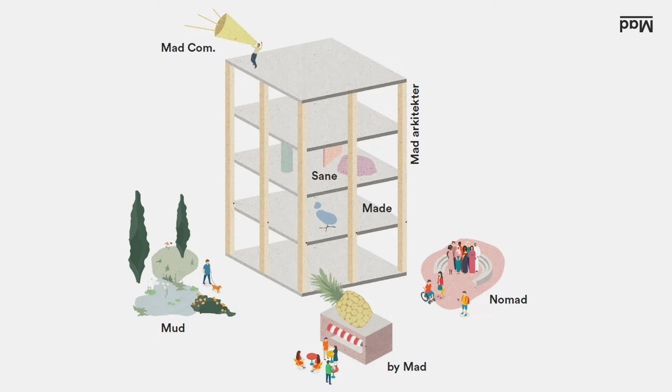And we are a Norwegian interdisciplinary architectural office working in several fields, approximately 100 people. We work with urbanism and architecture, interiors, landscape architecture, neighborhood planning. And our most recent adventure is by MAD. That's our own cafe bar. So if you are ever in Oslo, please come to visit.

We work with a broad range of projects, as I said, in all scales. Public buildings, libraries, new faculty of law in Oslo, city repairs and urbanism, big residential projects. And over the last years, we have worked more and more with transformation. Yeah, this is us. Our people are the most important, they are essential to the output of our projects. And our end goal is, of course, always to contribute to a better society.

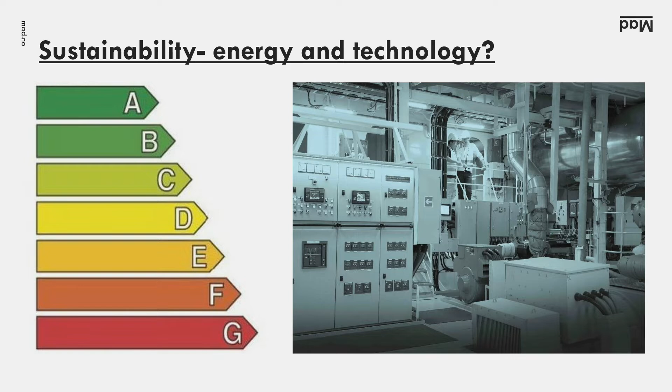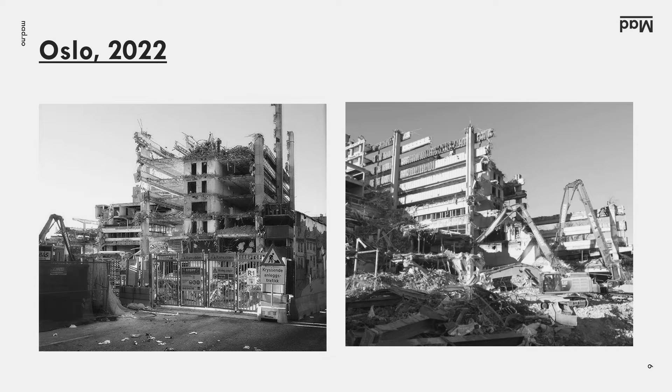Okay, I'll be very short with a quick intro of some of the challenges that we see in today's building industry. I won't dwell on these, but we should face that the building industry has a great impact on many of these goals and a great responsibility. Over the last decades, the building industry has tried to change radically to make buildings more sustainable. But the focus has almost always been on energy and technology. And we demolish buildings like never before to replace them with new ones. More energy efficient, maybe, or with better technology. And we can't continue on this path, we all know that.

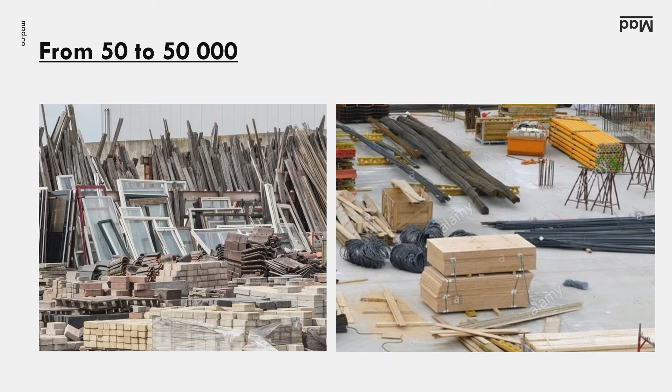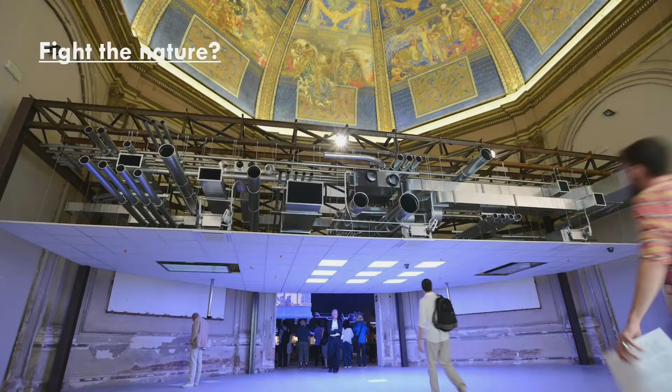We have seen that when we construct a building, in the old days, we might have needed about 50 different materials or components to construct one building, like wood and brick and steel and glass and so on. Buildings of today require an extreme amount of materials or components, and we can choose from millions. This is an installation by Rem Koolhaas from 2014 in Venice Biennale, and I think this image just says more than 1,000 words. And how did we end up like this?

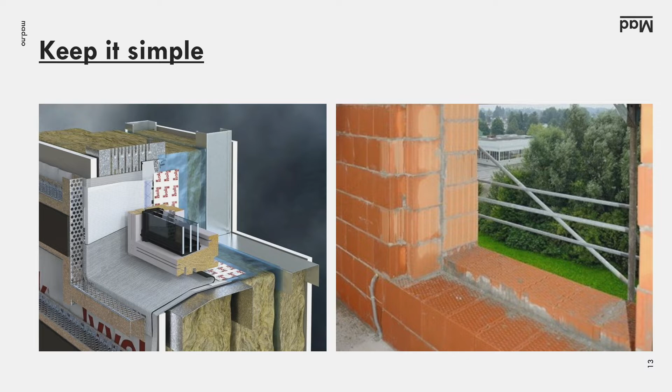The amount of components is one of the reasons and one of the problems of the great amount of waste in the building industry. These are just examples of outer walls. And the linear economy has given us materials that come with an assembly instruction. And suddenly we have installers instead of craftsmen. And we think that the simpler way, or the old-fashioned way of building, would be possible also today, but it needs a higher level of competence, both by the designers and the builders.

Okay, I'll show you some thoughts about what I think would be the buildings of the future. There might be more aspects to this. First of all, we are told that about 80% or maybe more of tomorrow's buildings are already here. And to not demolish buildings is great for sustainability. And it can also give our architecture and our cities a great and important historical and identical continuity. This is an example from Bergen in Norway, a transformation project finished 2017.

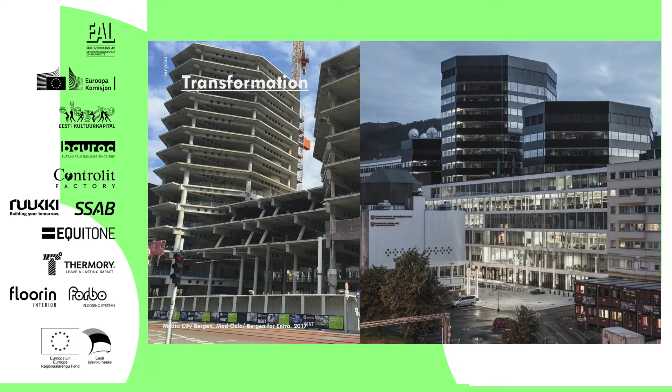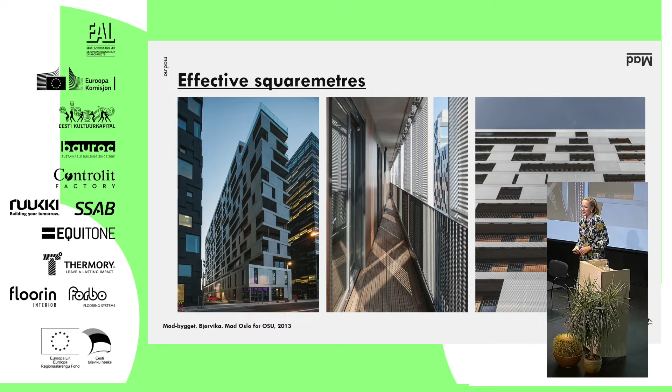If you look at living space and square meters per person, at least in Northern Europe, it has increased dramatically over the last years. And that means that the effect of less energy for our buildings is neutralized by higher consumption, which is a problem, of course. This is an example of one of our earlier Oslo projects. It's a housing block with a quite special format. It's only 7 meters wide and 90 meters long, and it had some challenges due to square meters.

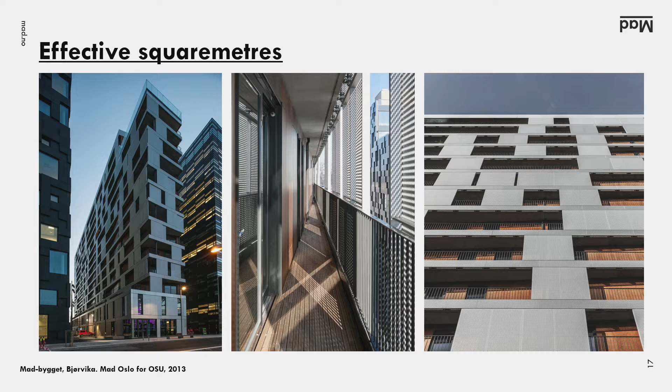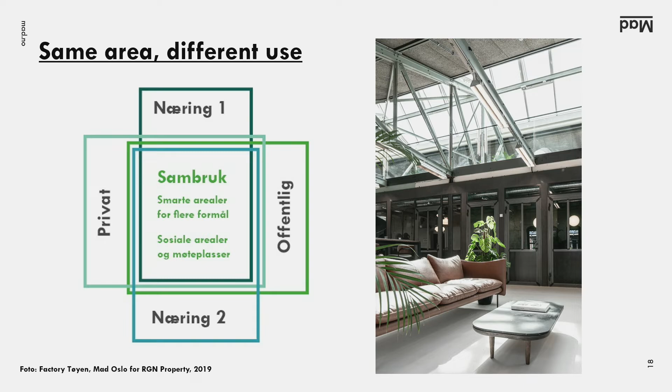And if we really want to cut our use of resources and build better societies, we need to use our buildings more. We need to use them for more hours during the day and for more purposes. Because the most sustainable square meters are the ones that we don't build. And that cuts emissions in all stages.

I just want to mention low-tech buildings also. I enjoyed the previous presentation, although I didn't understand one word. I loved the drawings, and I could understand some of the concepts. We haven't worked much with this yet. We hope to work with it someday. Our colleagues in Switzerland have come far. I just wanted to mention it.

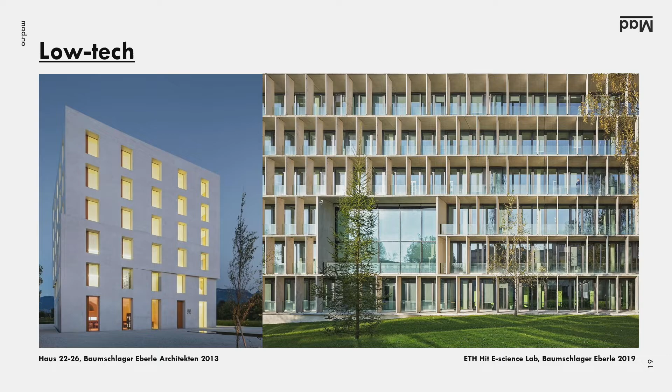And when my husband saw this, he's also an architect, he said, so you're going to build it from a different kind of garbage than you usually do. And I thought it was very funny.

I'm going to go into one of our projects to break the tradition of resource use in the building industry. We designed this project for a developer called Entra, one of the biggest private real estate investors in Norway. And they have a high focus on environmental sustainability. Spaces is the tenant of the building. They are an international co-working space company. And they have been really important for the realization of this project.

KA13 is located in the city center of Oslo. Since this drawing is made by an architect, you have no idea where it is. But this is the royal castle up here. And this is the parliament. And so it's in the middle, city center. And many people think that this project is a big project. It's not. It's quite small, but it has made a great impact.

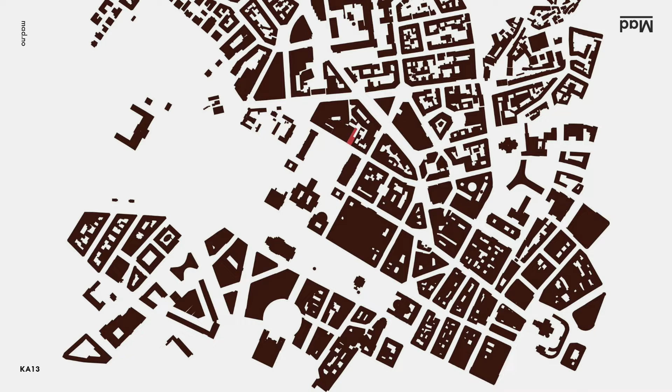And to put it short, we could have built a new building, but the amount of square meters wouldn't have increased very much. So that's the story behind why we kept the building. But once we were inside, we struck gold, and we found very nice and high-quality interiors. And we had a simple and flexible floor plan, which could be great for modern office space. And you see, there's the typical plan with the existing building and the new extension, and some of the interior photos.

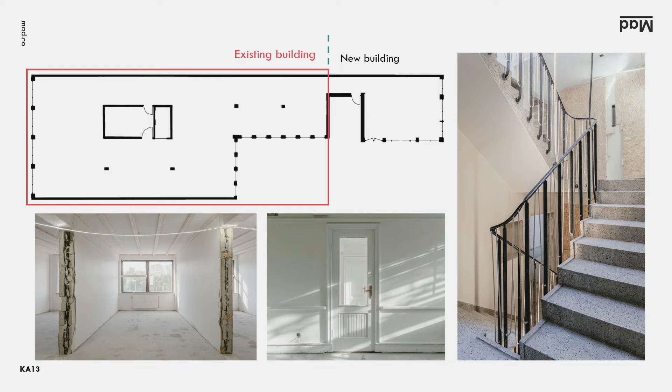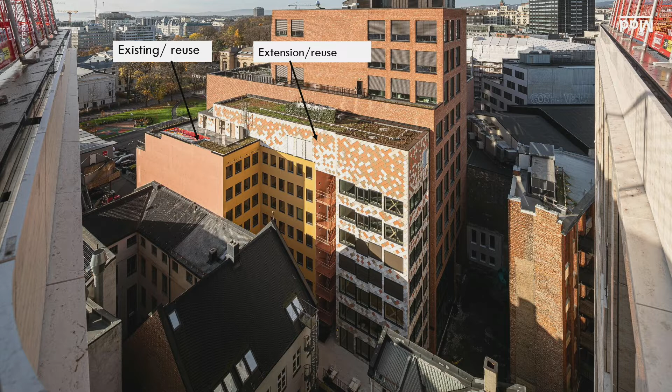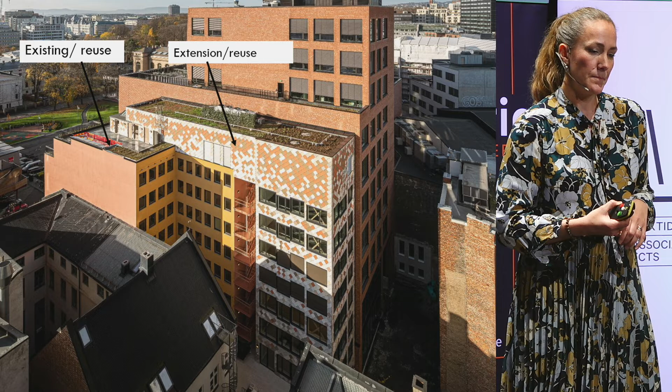With these discoveries, we decided to preserve the existing structures, and we simply added a new extension to increase the project's capacity and, of course, square meters. We built a new 8-story extension with reused building components, and those are sourced from many rehabilitation and demolition sites across Norway. Here we see the building from the back side, from the courtyard side, and the yellow and terracotta facades are the existing building. And that more playful facade is the extension, highlighting the fact that this is somehow a bit unusual building.

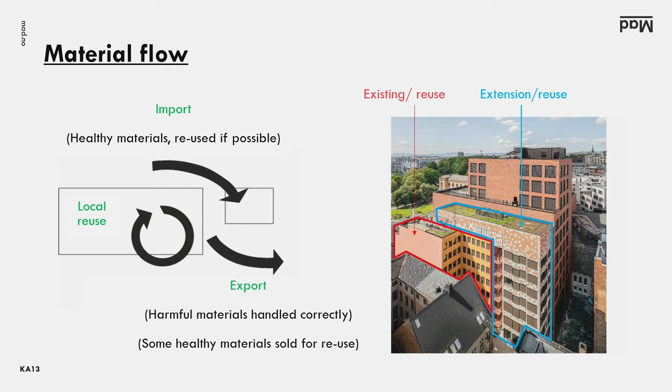The programming remained the same with offices on all floors. We included a bar and some new functions on the street level, but all in all, it's an office building. We had different material flows in the project. We preserved the existing building, of course, with all its components and materials within, which we would call local reuse. And we reused materials from other buildings, which were under rehabilitation or set for demolition. And even in a circular project, some things go into the circle and some things have to go out. Of course, with harmful materials and some healthy materials sold for reuse.

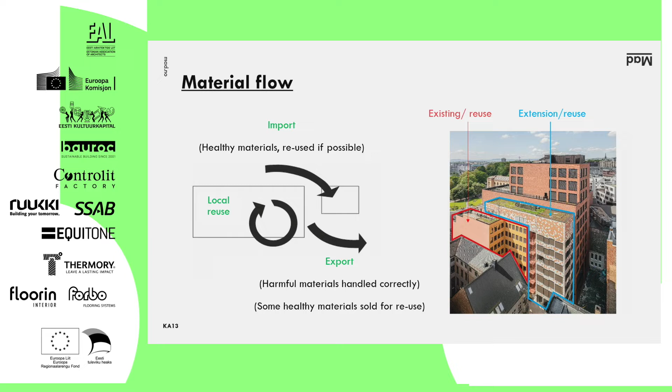So how does this process work? We have been working with reuse and transformation buildings for quite some time, and we have got useful skills and experiences. But reusing single building components, as done in this project, is something quite different.

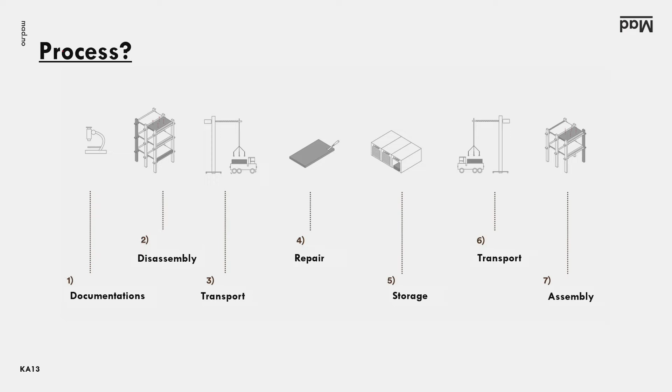And we made this diagram before we actually embarked upon this journey. And we tried to convince the market that reuse is doable and to help plan the process. And after the project, I'll show you in a while, we saw that this is a bit too simple, a bit naive. We thought it would be something like this, and it was more like this.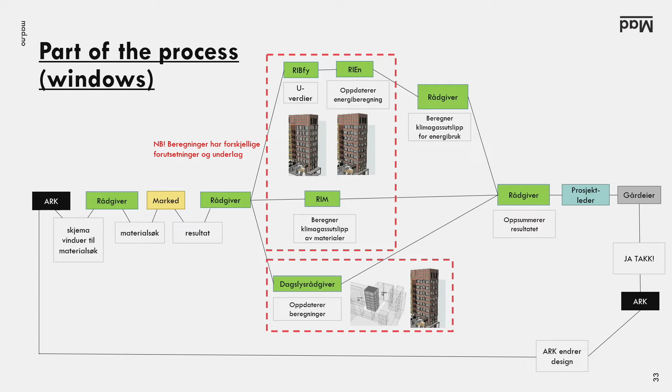I won't go through this in detail, but you see the chain. It's dependent on many different processes and decisions and stakeholders. This is a typical one for windows. I don't have time to go through it, but it's many different considerations made, and in the end it goes to the owner, and maybe they say yes, and if they say yes, they go back to us as an architect, and then we have to implement it into our drawings.

The amount of information is enormous. And the process diagram that we made before the start is more relevant as an overview of the new building industry and its many business opportunities. Examples: registering, developing databases, demounting, buying and selling, logistics and storage, testing and certifying, adjusting, industrialization of the process.

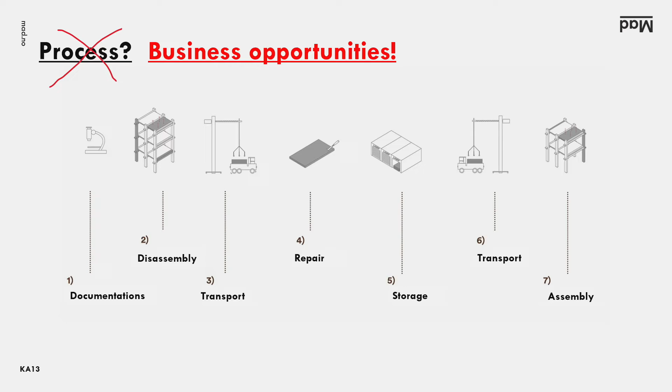I think this will go fast. We have learned now from the last 4 years. We started this in 2018. It has developed a lot in Norway and in many other countries.

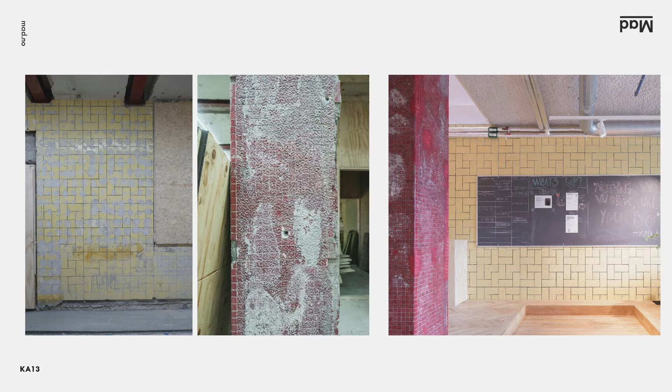Regarding the architectural concept, in order to maximize the daylight, we decided to make an atrium with vertical openings through all the existing floors and a large skylight on top. And behind paintings and plasterboards and a lot of different materials, we found a bit of everything, including colorful old tiles, which have been taken care of and restored.

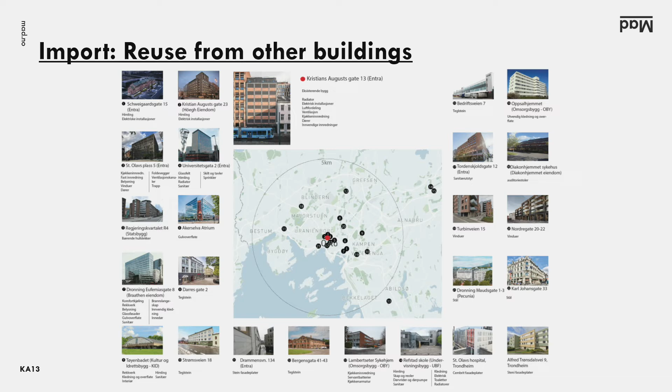But then there were the other materials from other buildings. How to find reused building materials? This was one of the first challenges that we faced. There was no marketplace for buying and selling, especially not for large-scale components. So we created our own network. And here you can see the sources for the reuse elements. They come from more than 25 different buildings and sites. And a small selection of components that we reused, from ceiling panels to doors.

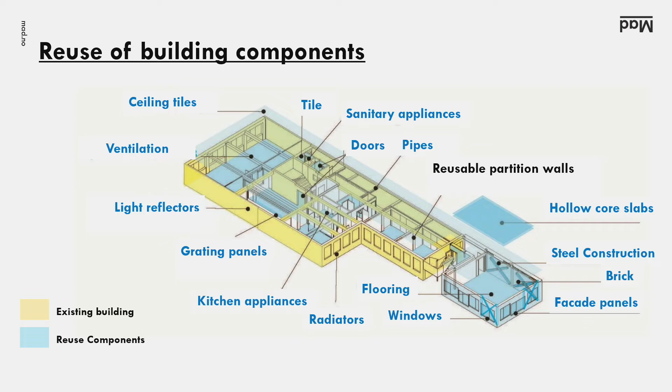This is a figure of a typical plan. The yellow is existing and the extension is in blue. I'll go through some of the components. The government headquarters in Oslo are currently under redevelopment after the terror attacks in 2011. A number of buildings are being condemned or set for demolition as part of the new plan. And the hollow core slabs in the new extension are sourced from one of these buildings.

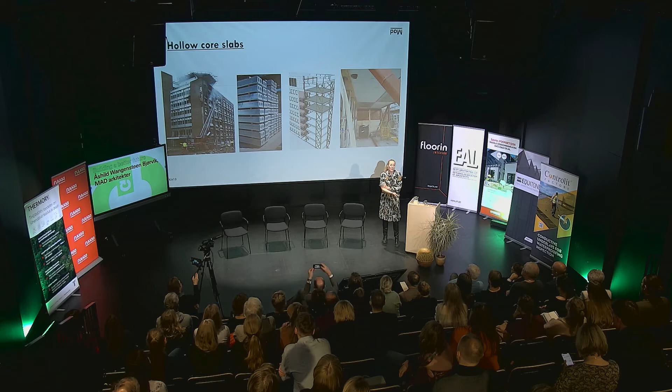There were several different challenges with engineering and logistics and cost, but it has shown that it's possible to reuse structural elements. And I can mention that these reused slabs resulted in 89% lower emissions for this specific component. And it's important to note also that it has already been saved. It's not something that we project into the future, like we do with energy calculations.

Steel structures: approximately 70% of the steel structures are reused steel. And mostly they are bolted together, not welded, so it's possible to demount and use them somewhere else in the future, when this building's life cycle comes to an end.

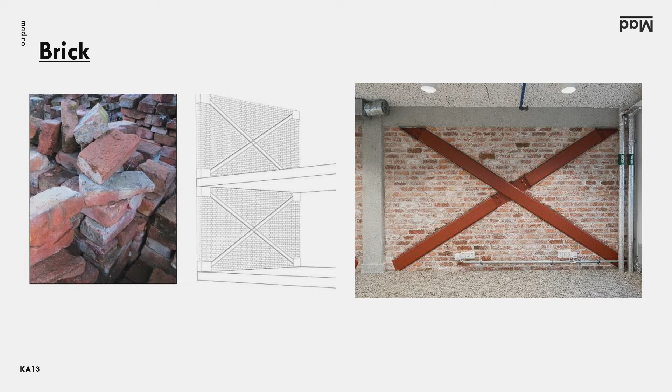We reused brick. This is a load-bearing firewall, and in standard procedure for this kind of building, it would have been concrete. But we decided to make it out of reused steel and brick. And this is a typical construction from my colleague Trond. He loves this wall because it's like the old German constructions, like outer walls of brick and wood. And it has become an interesting wall that people like.

We got the windows from another project, and they had ordered and received incorrect windows. So this is surplus materials.

It was a big housing project in Oslo, and they received windows that couldn't be opened, which is a problem for housing. It's a bit easier for office buildings. And to the left, you can see the original facade sketch with quite regular windows. But we had to adjust it because we didn't know the format. And these processes didn't really coincide. So we had to make a rhythm for the windows that could adjust to different kinds of formats.

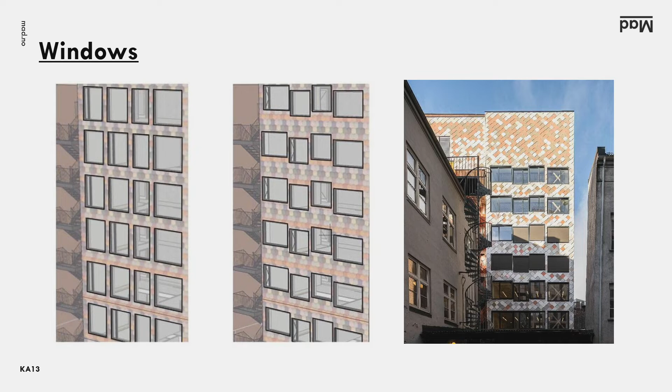And this exemplifies the difference from a conventional design approach. And it has made the facade a bit strange, but it could have looked even stranger. The facade panels were sourced from 3 different buildings, 2 in Oslo and 1 in Trondheim. The plates were trimmed to smaller sizes, 40 by 40 centimeters. Some of them got painted and then mounted on the facade in quite a traditional way.

We love this facade not only because it's a bit different from many others, but also because it's flexible and you can change parts of it and adjust, and you can take it down and use it in another building without any big problems. You can vary the colors and you can mix it all together. We worked a lot with this, both in the design phase and on site. Yeah, you can see the donor building over there. Maybe we should have kept the graffiti.

The bathroom tiles, most of them are surplus materials. We called the tile supplier and they said, yes! And then we got 15 pallets of tiles to the building site. And we just had to choose on site, you know. We couldn't make any schemes or any details or anything. We just had to choose them and lay them out and build, which was wonderful.

And the result is kind of refreshing. Every one of these rooms is unique. And I think we would have wished to find more colorful tiles, you know, because they're only like beige and black and grey for the time being. But anyway, it looks good.

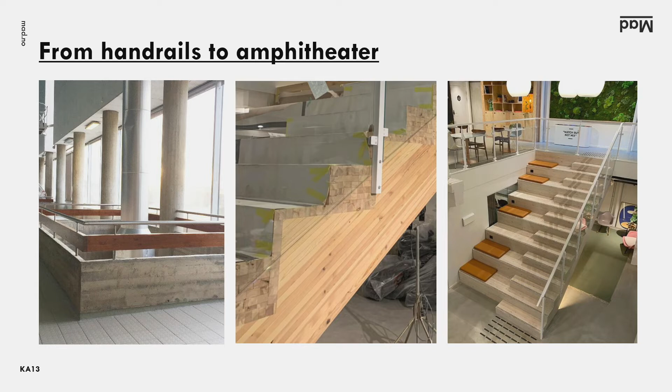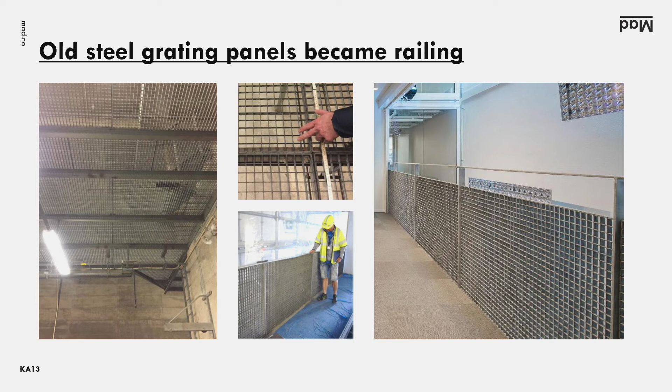Old steel grating panels. This is a floor in a technical room in the same swimming pool building. We often get asked, isn't it boring? Isn't it difficult? But it's very, very exciting. And to find new functions and new use for elements and to put them into a new context can be a very creative experience. These were flipped and became railing. And it looks easy, but these workers were swearing a lot when they mounted these.

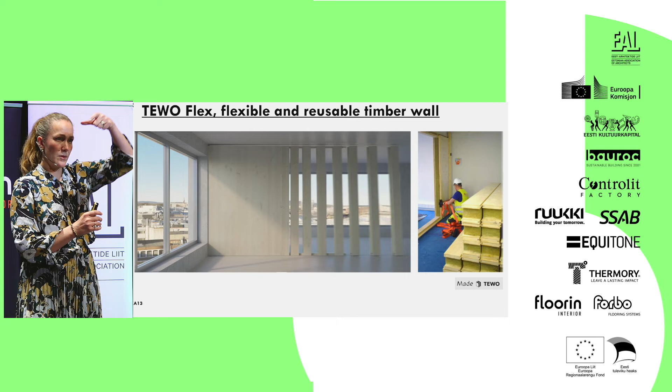We also had some new elements in the building. These are office partition walls in massive timber, made in Norway. We designed them as modular blocks. They are about 20 centimeters wide, and you can put them together. You have a line on top and on the floor, and you just skew them together. And then they go click, and you can demount them without tools, and you can put them somewhere else,

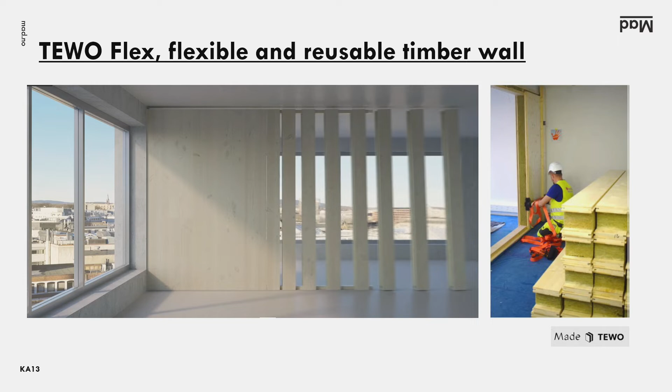which is very useful for this Spaces company that is the tenant, because they rent out different spaces and they want to move the walls many times during the year. So it's practical for them. And this is kind of a prototype. We have them also in our office, and they are quite nice. Sometimes when I'm in a Teams meeting in our office, people ask, "Oh yeah, so you're in the mountains?" And I'm like, "No, I'm at the office," which is great.

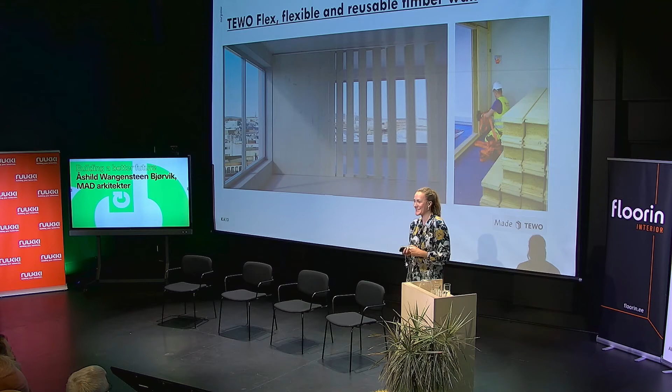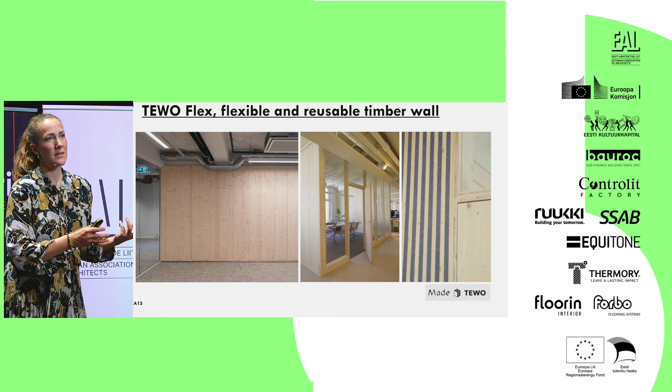Yeah, this is some more pictures of it. We added some new functions and some new recycled textiles for acoustics and stuff like that.

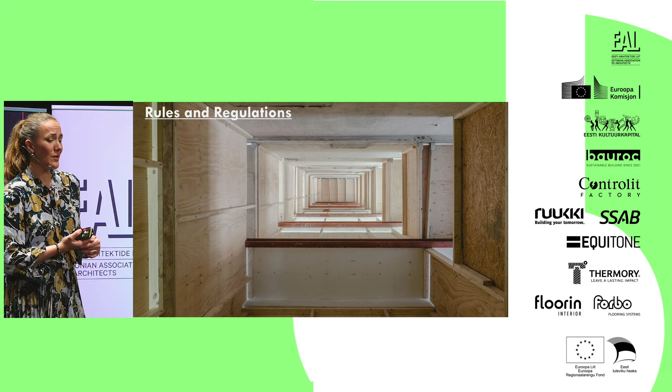Okay. A bit about rules and regulations. Norway has one of the most stringent building codes in the world and has a very strict interpretation of the EU rules regarding construction product regulation and the CE marking. And in terms of the CE marking, not all materials need this CE marking. Some materials are not defined as construction products, and therefore they don't need this accreditation, neither new nor used. An example of this is moldings or upcycling of materials. For example, if you use windows as partition walls.

An interesting experience is also that many people think that if you talk about reuse of building materials, you talk about old materials, which is not really the case. The market for quite new building materials set in buildings that are changing should be great. It's not really now, but it will be in a few years, I'm sure. On top of the EU regulations, we have national building codes. Yeah.

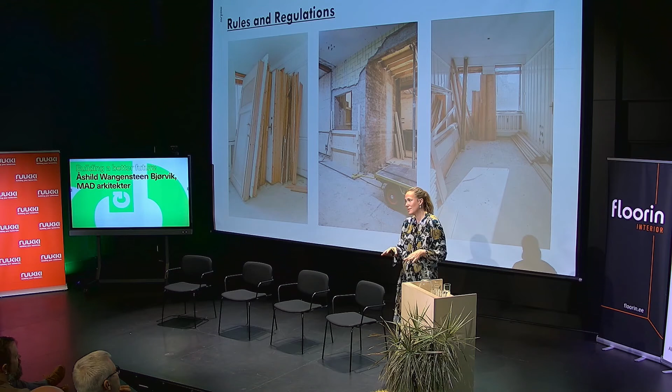And in some cases, we found that the documents in the archive or the material documentation could fulfill the requirements. But for other materials, we found it necessary to develop new quality control procedures and test methods in order to create the new documentation for this. And it was difficult in different aspects and different materials. I think the most difficult was maybe the concrete, so the hollow core slabs. The steel was a bit easier, for different reasons. I can tell you more about that, but I will keep going.

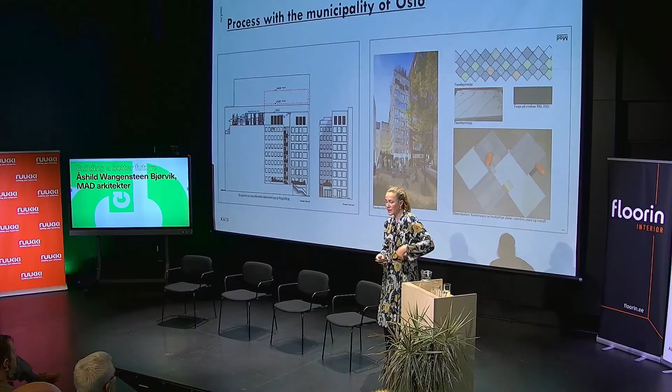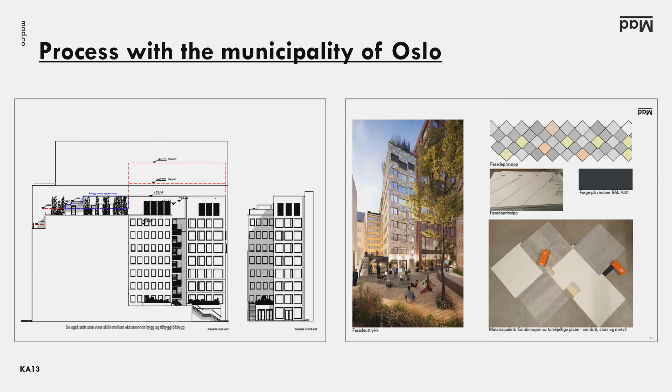When it came to the application process with Oslo municipality, we entered the dialogue with them before sending in the application. And we explained the project's aims and ambitions. We really had no idea how this would look. But we had a clear concept for the building size, of course, and the volumes. The colors and details were not really finished, but we got the confidence, and the council were supportive, and they showed flexibility, and they trusted us, which was great. So we agreed that we would send updated facade drawings before starting the building, and it was okay. So that's good.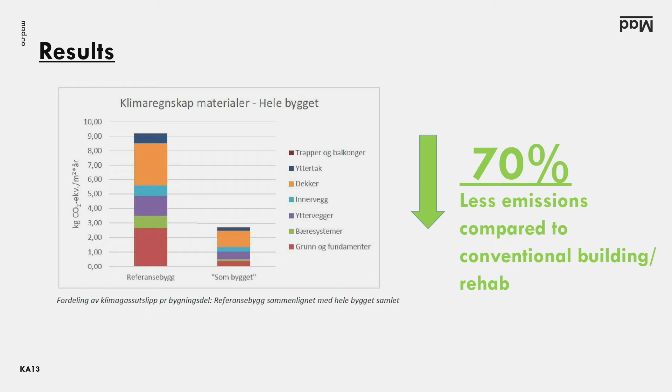So what were the results? By preserving the existing building and adding the new extension in reused materials, it had an enormous impact. A 70% reduction in CO2 emission compared to a conventional building or a conventional rehab and extension. If you look at specific materials, such as windows and cooling machines and concrete and steel, you are much higher. You are about 90% less emission. And this project was followed by many master students in Trondheim who could do research on all of this.

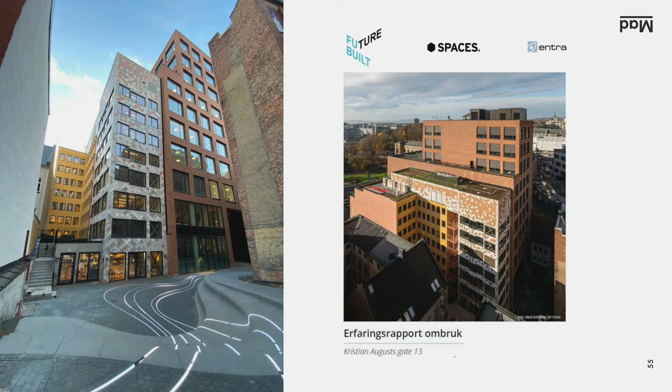Entra, the developer, and FutureBuilt have also made a full report about this project and it has all the documentation. Right now it's only in Norwegian, but we have decided to translate it, and it's full of figures and facts and illustrations, and it will be possible to read soon. You can find it on futurebuilt.no, but I don't think the translation is ready yet, but it will be soon.

So we are witnessing a revolution in the building industry. And the fact that we could build an 8-story building with reused materials in the heart of Oslo, bound by some of the strictest building requirements and regulations in the world, by a private developer and a private international tenant, proves that the concept of reuse is not only realistic, but it can also be feasible and really attractive. And for us, it's made a huge step towards a new way of working.

At the end, I would like to share some of my reflections or advice or some experience from this. People have reused buildings and building materials for thousands of years. It's just that the last 60 or 70 years we have totally forgotten how to do it. Yeah, as I said, I think it's possible to build simpler and to build with better materials also for modern buildings.

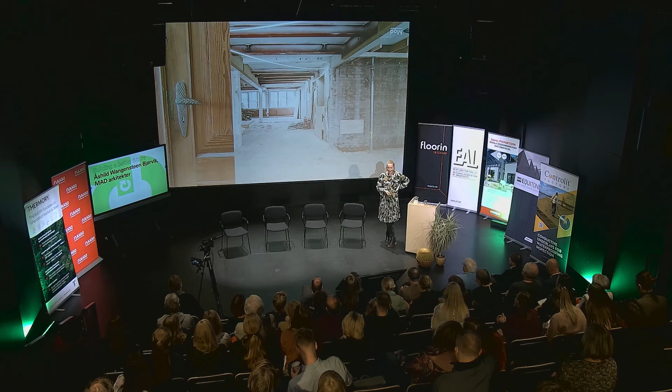With transformation comes unpredictability. And we think that we as architects and consultants need more responsibility for making new solutions and for working with innovation. I get annoyed that so much of the building industry is pre-accepted. It has pre-accepted solutions. I think the future is not pre-accepted. And innovation needs a certain freedom to make and a certain responsibility.

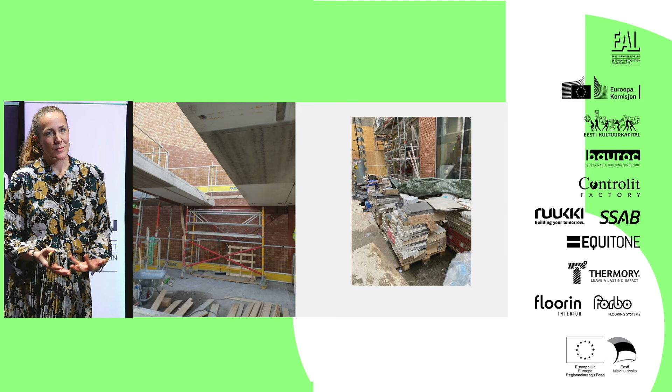An important experience is also that people ask me, is it expensive? Is it more expensive or is it cheaper? And most people think that it's more expensive, and yes, it is. But the difference is great between the different materials. Some are expensive, some are cheap, some are for sale in great amounts, and some you have to search for. Some need a high degree of manual work, and others almost nothing.

An interesting experience is also that, like I said before, you would think that reused materials is about old materials, which is not necessarily the case. The glass facade on street level in KA13 is taken from this building in Oslo. It's a CBD building, only 9 years old, but they change all the time and sooner than you think.

And just a few days ago, I was in a presentation with Entra, the owner of this building, and also another building that we have designed in Trondheim. It was finished like 2 years ago, and that has become a donor building now for another project, which makes my heart really warm.

Find methods to convince the clients about reuse. And our experience is that the most effective way here is to find out how they can spend less or get more income, to sell instead of deposit, to reuse instead of buying new material. It's not easy, but always search for the possibilities.

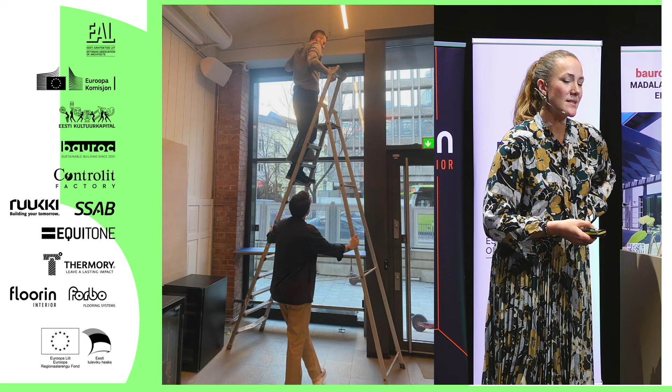If you work with innovation, you'll know that it requires taking on new roles and, as we say, new hats. Be brave and don't expect anyone else to do the job. Search for new business opportunities and new niches and new fields of work. And keep it on a practical level. We who work with reuse, we are a bit worried that people will start working with this on a very theoretical or digital level.

These doors were offered to us as reused materials, but they were demounted without attention to the fact that the door consists of both a door and a frame. And you need to know these things. It's not complicated, but it's necessary to know. And we as architects have to spread the knowledge and to collaborate, and of course also ask a lot of questions to all the people that we need to collaborate with in the building industry to develop this.

A circular building industry will require great competence and a new kind of commitment and collaboration between the designers and the engineers, but also with the contractors and the craftsmen. It requires craftsmanship and not assembly.

This pile of construction material was demounted from this building, from KA13. And when we were there together, it came to a kind of a spontaneous brainstorming, what to do with this. And the contractor suggested that we could make floor out of it, or many different suggestions. But I was standing there and I thought, you wouldn't get this out of a database. You need to feel the materials. You need to know how to work with it, to be able to have any idea what to do with it. And I think in a circular economy, the wise hands and working with the hands will be just as important as artificial intelligence.

New developments should be regenerative, built on a foundation or understanding of what is already there, and adding to the health and sustainability and biodiversity of their context. And we have more local resources than we think. And we should combine it always with local knowledge.

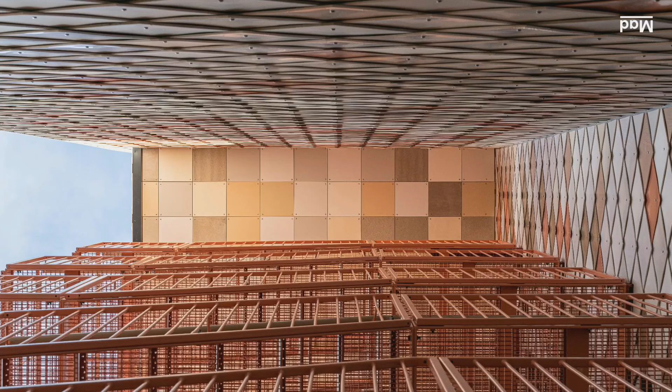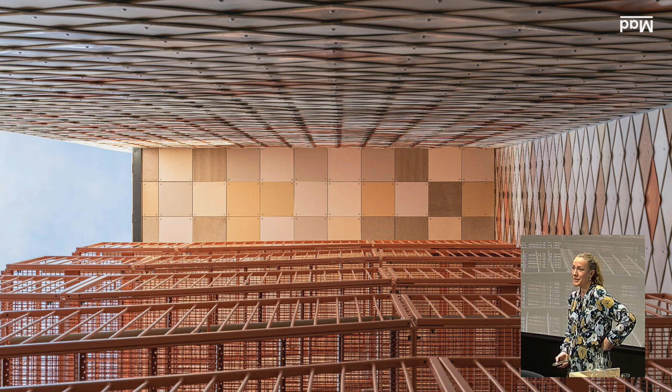And we need to make a shift in how we build and have greater focus on quality, both in buildings and in building components. Products with high quality will last longer and can be reused later. The best buildings are also reused. And beautiful buildings are valued, conserved and adapted, outliving their original function. And I think beauty might be one of the most important criteria for a sustainable and a circular building industry.